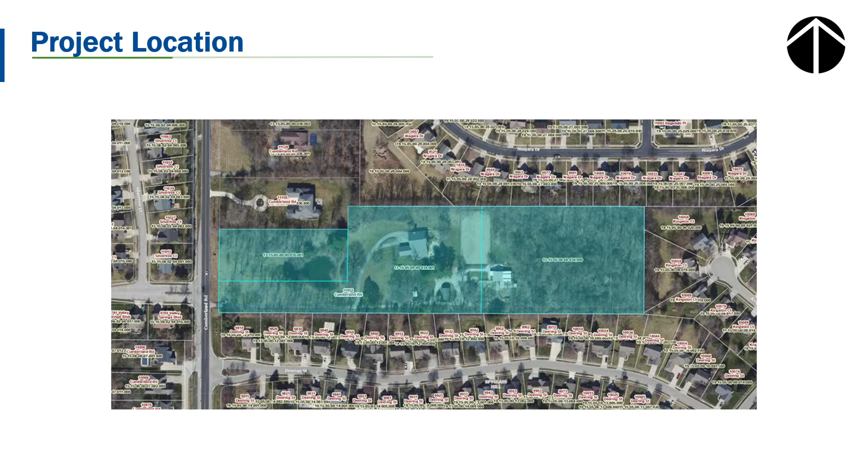Can you hear me better? This property is surrounded by residential properties, zoned PUDR, Legends at Geist, to the south and east of the property, and R2 and R3 residential to the north and west. Here is a look at the homes in the surrounding neighborhoods.

Pulte Homes, the petitioner, has proposed a development with 21 single-family lots, 2 common areas, and a common area buffer yard adjacent to the existing homes. Pulte held a neighborhood meeting on March 13th, 2025 to discuss the project with neighbors. The biggest concerns from the meeting were regarding drainage on the south side of the development, the buffer yard around the development, and traffic.

Fishers stormwater engineers reviewed the drainage on the south side of the development and determined that the drainage slope behind the homes along Deering Street looked natural and adequate for the area. Staff shared this information with the surrounding HOAs, asking homeowners to reach out to the stormwater engineers if or when they experience issues. The entrance to the development will align with an opening in the landscaped median that is planned for the future Cumberland Road expansion. The City of Fishers Fire Department has approved one access point for this project.

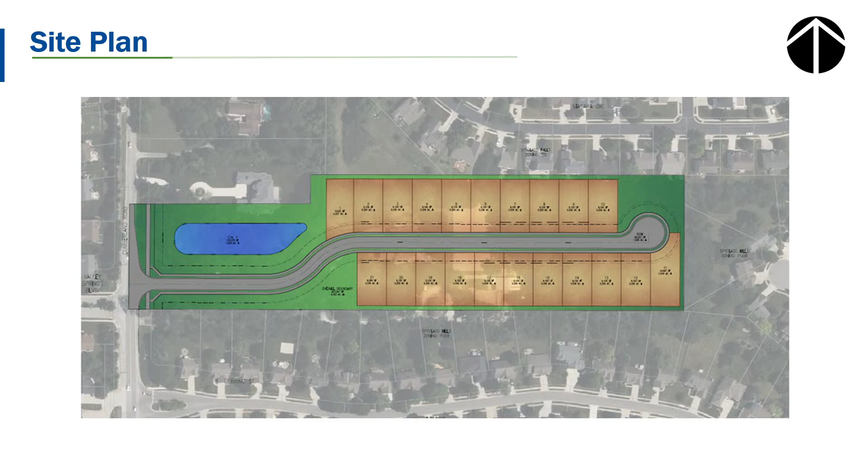This is the Riverton floor plan or elevation. It's a two-story floor plan, 4 to 6 bedrooms, 3,100 square feet, multiple building materials, covered porches, multiple roof lines, a variety of roof types, 2 to 3 car garages, and decorative garage doors.

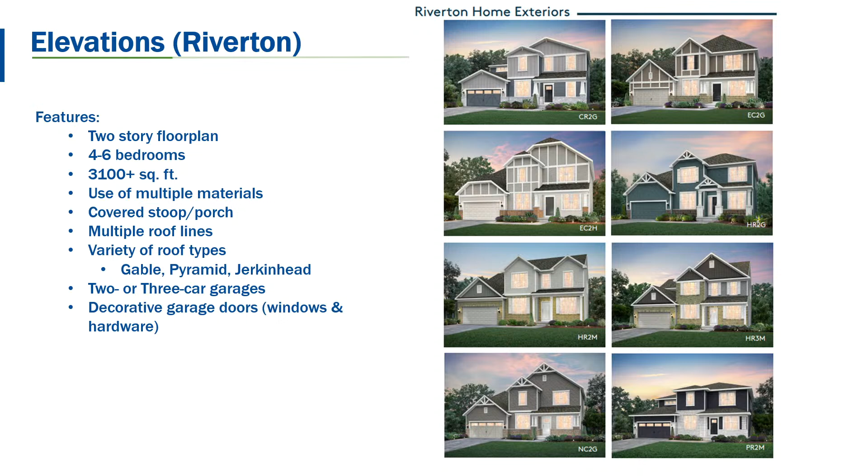Staff recommends the removal of the following: EC2G, EC2H, and PR2M in the Amberwood collection. These models include oversized board and batten pattern and/or roof types that are inharmonious to other homes in the area.

In the Greenfield collection, staff recommends the removal of EC2G, EC2H, HR2G, HR2H, HR2J, HR2M, HR3S, and PR2M. Please note that the staff report did incorrectly list the removal of CR2G instead of EC2G, so it's corrected here. In the Hilltop elevations, staff recommends the removal of EC2G, EC2H, and PR2M. In the Riverton model, same 3 models. And in the Westchester model, it's the same 3 as well.

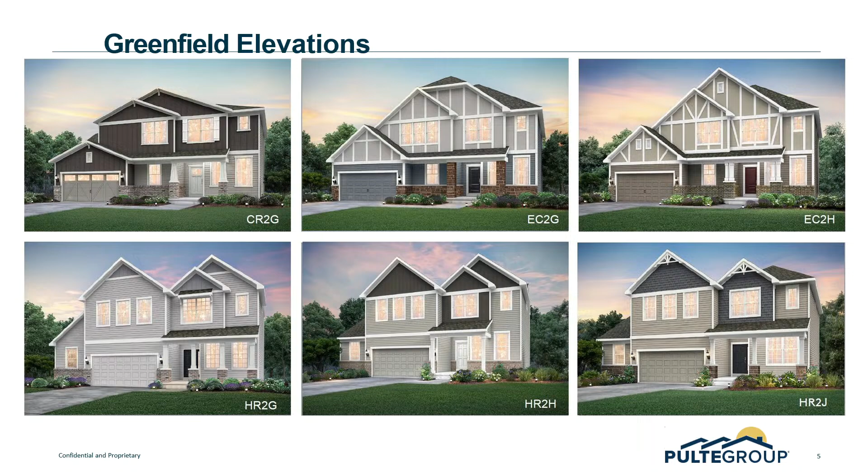For sure on these greenfield elevations, I think the Hilltop exteriors are the better ones of the whole development. But I am really concerned about the Greenfield, the Amberwood.

What's anything that ends in G, like those big flat front windows. Are you seeing on your screen what I'm seeing, or are you able to access different stuff?

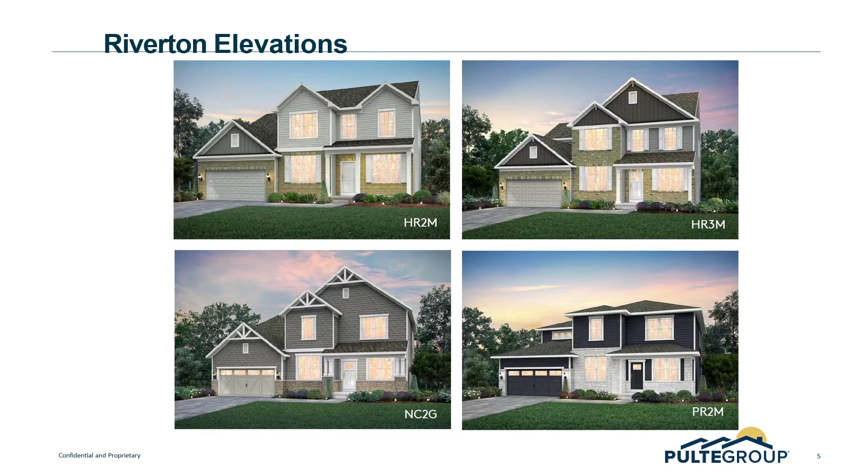No, so in that one, M. On the previous ones, Westchester, HR2G, yeah, those big single windows, that big expanse. EC2H has a little bit more character to it since it has that breakup of the roof line in the front of it. But the other ones just seem so flat to me.

And so I'm kind of struggling with the whole submission right now, but I want to let my other committee members respond.

Any thoughts? I'm not seeing what you're seeing, Megan. I mean, if I'm looking at the ones with those vertical slots in there, right? They seem to remove a lot of those, from there, like the top right example.

Yeah, and you know, me personally, I wouldn't want that because I don't want to paint it a different color every 10 years. Added labor. But to me, I can see where that's coming from, and I don't see the flatness either, Megan.

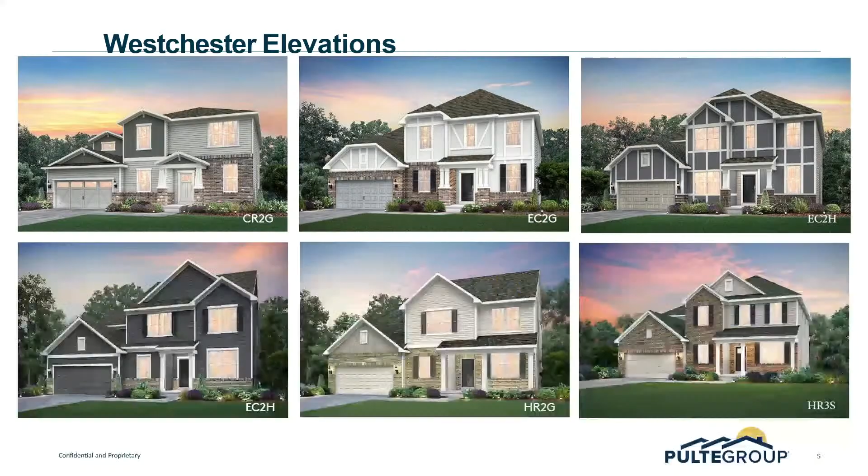What about 2G? HR2G, bottom center. Yeah, that has probably a lot more due to paint than I think, because there's a lot of articulation there. I see 1, 2, 3, 4 different roof lines there, right?

I don't mind the larger windows because I almost guarantee you that's a bedroom upstairs. Okay, so I'm sitting inside my bedroom and I've got a big expansive window in the back and I like all the light in my bedroom.

So it's a matter of personal choice when you're going there with this kind of stuff. I don't see the flatness you're talking about, because that's one thing that I go a little crazy on too, particularly when it's in the rears and you're driving past a neighborhood and they're all the exact same line across the back. That drives me crazy, right?

And we've done a lot to force that issue with the builders to do some articulation in the back to get some character so they're not all sitting there 100% flat. It's an easy thing for me to see as I'm coming home on the borderline of McCordsville and Fishers, because McCordsville has 100% flat sides in the back. But I'm not seeing that there.

There was one that I wasn't jumping, I think it was in the first group. Is that the very first one, or was there one before that? There was a ranch one. The ranches were the Amberwood, yeah, that was the first slide.

The ranch one, probably the top one for me is the one, but again that's a personal choice. To be fair, for the ranch plan, I would guess there's 3 or less ranches built in this community. Because this is gonna be mostly 2-story, given the proximity of where it's located in Fishers. I'm a ranch homeowner myself, so I like the ranches, but again that's personal choice.

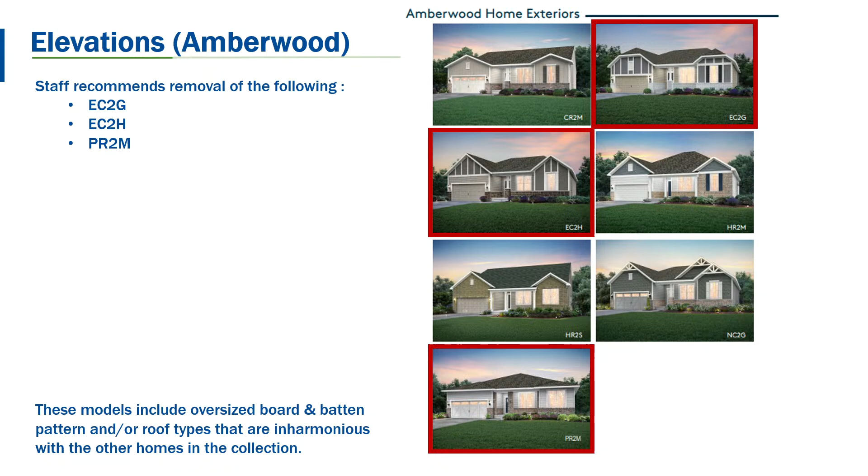Mine, if I were to make a motion, it would be to approve per staff's recommendations of eliminating those models. That would be my position, but I don't want to make that motion.

Okay, as much as it pains me, I'm going to make the motion to approve the staff recommendations. I would ask staff, let's revisit it again and make sure we've got something concrete, because I don't disagree with what Rex is saying either, that having more choices in that neighborhood - we've eliminated a lot of them.

Since it's a smaller neighborhood with 21 lots, I think it's even more important that there's cohesiveness and the same quality and character throughout, because it doesn't connect to another neighborhood. My counter argument would be if you've got more choices, it almost looks like a custom neighborhood rather than a production neighborhood - there's more diversity, so you don't have two houses down that look the same, because it's different in character.

So you want to take out other ones then? I don't want to take out any more. I'd like to add some back.

Perhaps I could propose this. I understand the dislike of the vertical, the Euro country style, and I understand the prairie. I would say if we're able to find one to two more elevations that we could keep on the greenfield, we'd be okay removing the others that are heavily disliked, and take staff's recommendation. If we could pick one to two more of these to keep, we can figure that out.

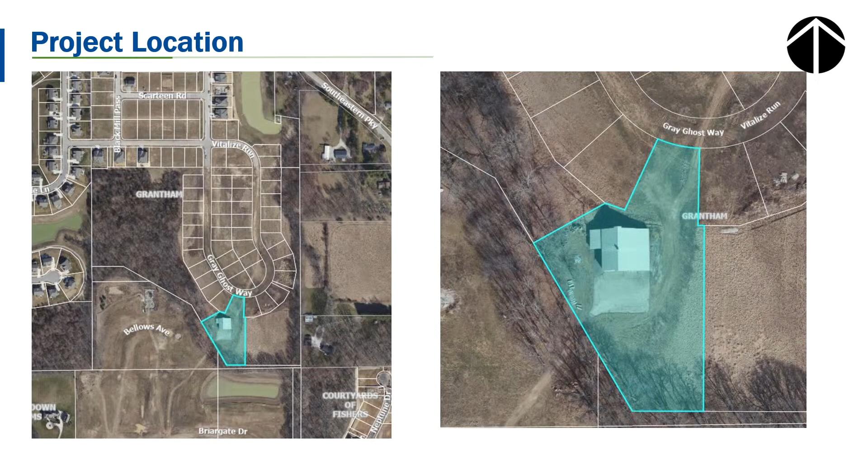Here you can see the site in context, and how this existing structure is going to be adaptively reused for the amenity center. The amenity center will include recreational facilities, a pool, outdoor recreation areas, and an area for a dog park as well. Here's the site plan and layout, including the parking that will be available for the amenity center.

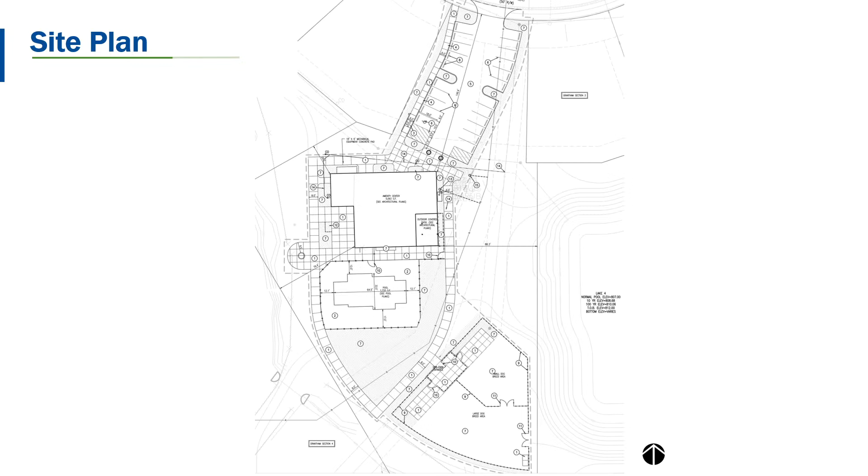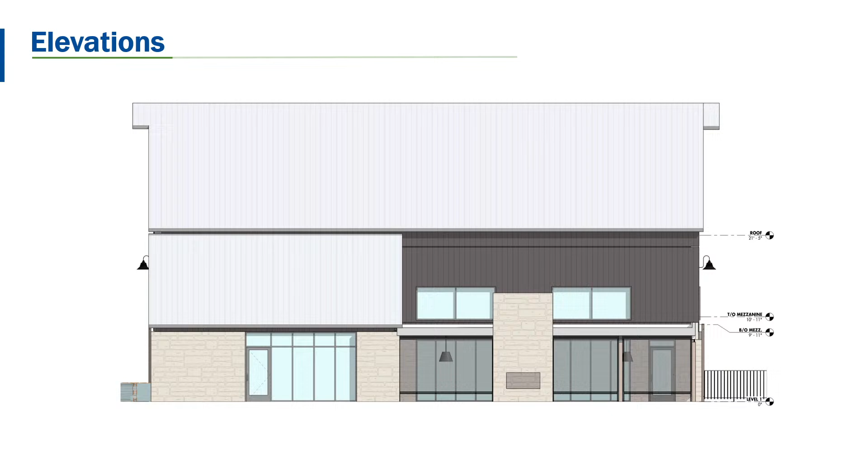With that, we feel this proposal meets the requirements of the PUD ordinance and other UDO requirements, and we are recommending approval with the condition that the site plan meets all requirements of the TAC committee through that process. That'll conclude my presentation, unless you have any questions.

Thank you. Any questions for the staff? Do we have the petitioner here with us? I do not believe we have a petitioner presenting today. Kyle Eichhorn, HWC Engineering, on behalf of the petitioner to answer any questions you may have. Thank you, Kyle. Any questions?

I think it's a cool reuse of that existing building, so it adds something unique to the development.

Motion to approve. I'll second. We have a motion by Pete, including the condition with all staff conditions, and a second by Megan.

Roll call, please. Ms. Baumgardner? Yes. Mr. Peterson? Yes. Mr. Bender? Yes. Mr. Stevenson? Yes. Thank you, the motion does carry.